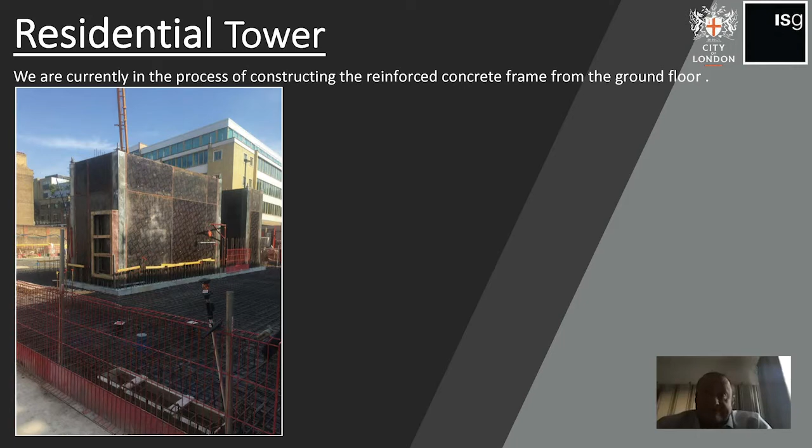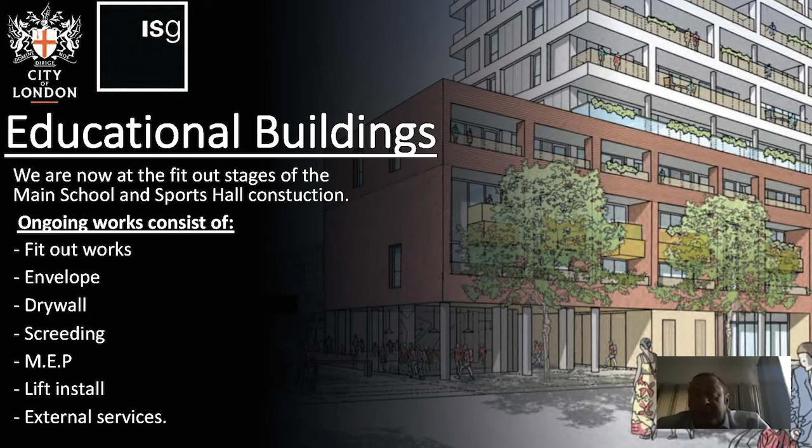If I could have my next slide, please. Right, I'm going to go on to the educational buildings now. Basically, most of the work we've done, and the most advanced section of our works, is the main school building and the school sports hall.

I've got two slides up on the screen now. The one on my left is of the corner of the sports hall, and the one on the right is from the entrance to the school on Baltic Street West, looking to one side, into the nursery area. What this slide shows is that we have started brickwork. The brickwork's quite advanced, and we're approaching the first floor sort of level with the brickwork.

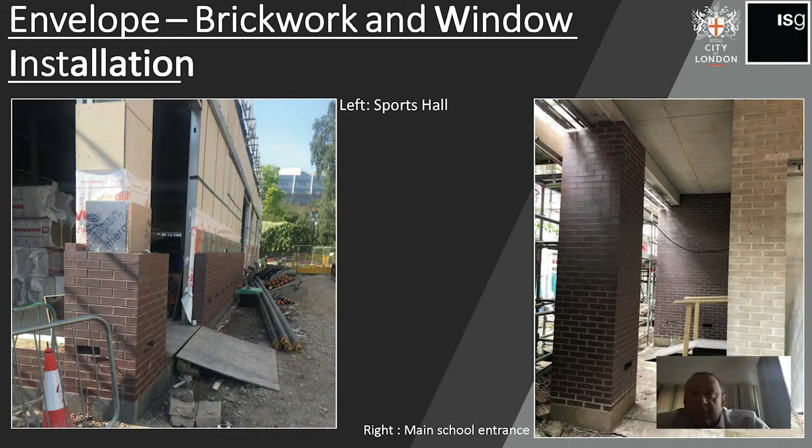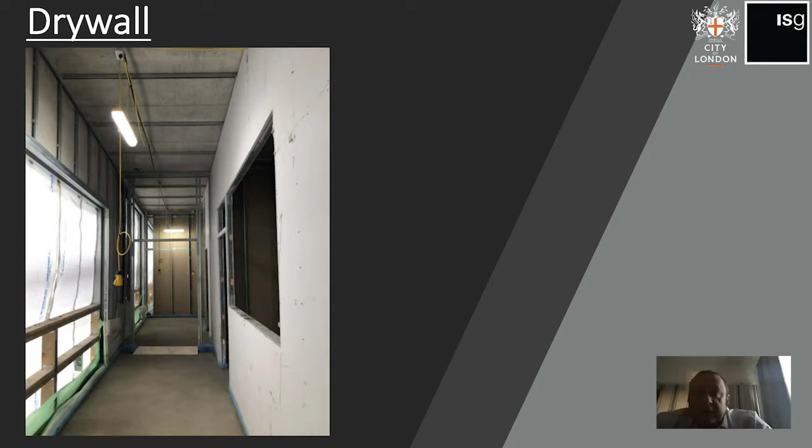If I could have my next slide, please. Again, inside, what we've been able to do, and which I think is common practice now, is waterproof the building using temporary measures, and we're advancing with the internal partitions and some of the services within the school building. I think I took this photo on the second floor, and it's looking down one of the corridors. If I could have my next slide.

Again, this is looking down the corridors. I took this slide to give an idea of the floor finishes. So again, we're quite advanced, and we've laid screed. You could probably see the screed is in the process of drying out, so it's only just been laid.

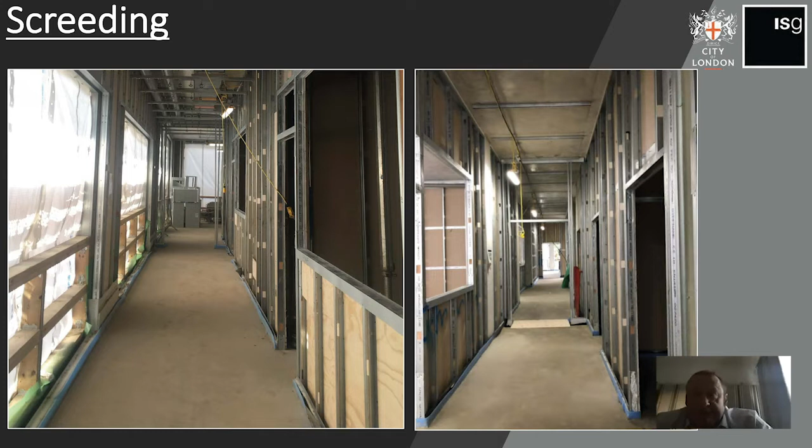Again, this is services. So again, we're quite well advanced, and you can see the services within the school building. I would say at this point, what I've shown you within the school building, really this is what we'll be doing for the next month, 2 months, 3 months. A lot of it will be building on the progress we've made, putting in more services, and starting the finishes, closing up partitions. Again, the 2 slides show our mechanical electrical installation.

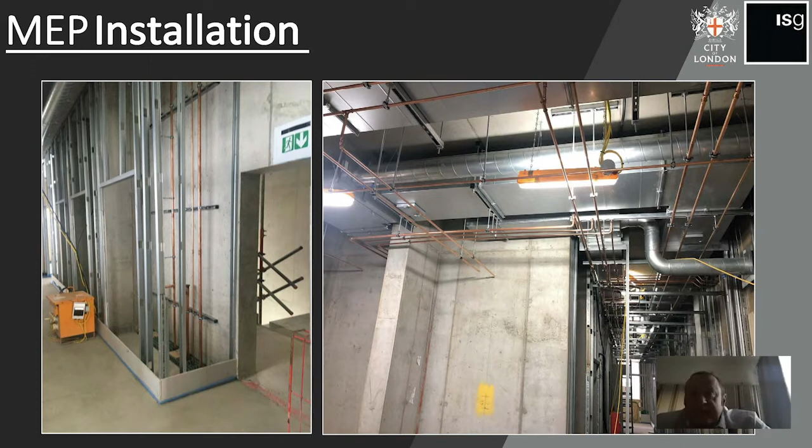For those of you who don't know, MEP means mechanical electrical plumbing installation. I put this next slide in - it's a bit of a boring slide, really, but the point I wanted to make is we've got the lift shaft formed in the school, and it's ready to accept the lift that's been supplied to us by KONE, a well-known manufacturer. I'm hoping to start the lifts around the end of October, and they'll take about 6 weeks, I'm hoping, to install.

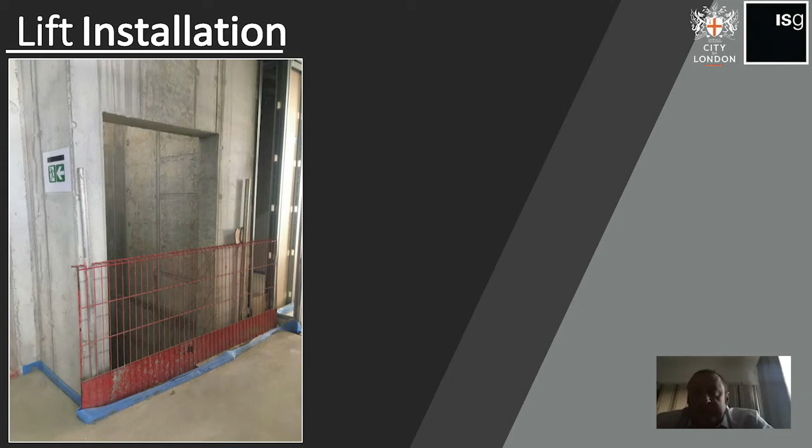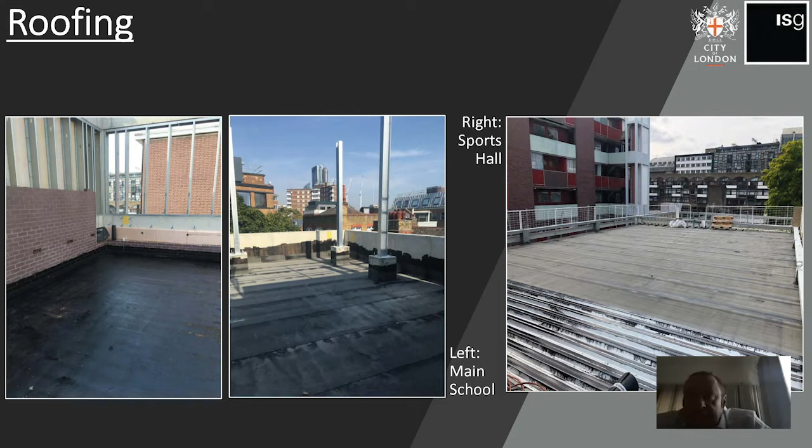My next slide. Have you got my next slide, Catherine? Yeah, I think there might just be a little bit of delay, Steve. Right, turn it to the next one. Can you see that now? Oh, right, okay. Yeah, that's fine.

What we're doing through the centre of the site is we're putting in all the external services. So for those of you who overlook us, you can probably see this trench, and basically that's for putting in gas main, comms, electrical services, district heating, water - generally all the services that you'd normally expect to have in the building. So they're the services that will be feeding the building, and they're picked up from Golden Lane.

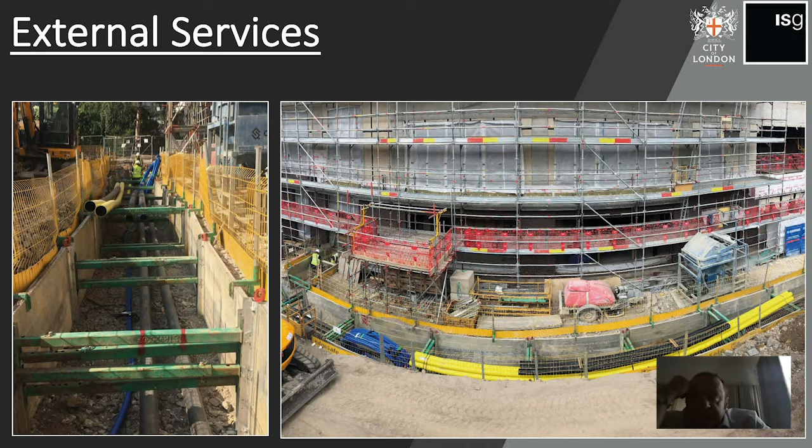So generally progress is going well. What you've seen really, and what I've spoken about this evening, is what we're going to be concentrating on over the next couple of months. I think this is my last slide, so if anybody's got any questions, I'll be pleased to answer them at the right time. Oh, I can't forget this one.

It's the monitoring results. We continue to monitor noise, vibration, and dust at 2 stations that we've got now - one behind our offices on Basterfield Service Road, and one at the back of the site by Hatfield House. This is a sample of one of the graphs that we sent over. Again, we continue to publish the results on a monthly basis that I believe is attached to one of the newsletters.

Yeah, that's right. I think that's it, isn't it, Catherine? Yeah, that's it. Just to note, the monitoring results go up on our website for the previous month, so you can view them all there if anybody's interested in taking a look.

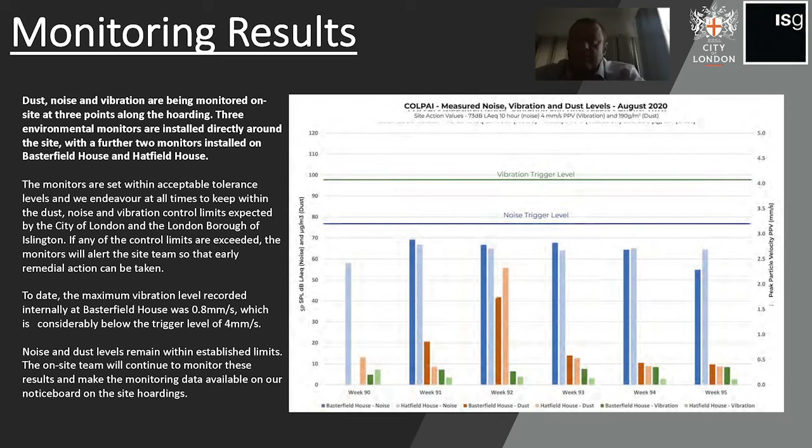I'll take them in turn. So the first one is: taking into account COVID spacing requirements, we do not know what will happen in the future. Are there any plans to increase spacing in the common areas of the new development, school corridors, etc.? Steve, would you be best to answer that one?

Sorry, are we talking about COVID? Yeah, so in regard to COVID and spacing requirements, are there any plans to increase spacing in the common areas of the new development, such as the school corridors?

Hi Steve, it's John here. Does the question relate to the permanent design of the building? Because if it relates to the permanent design, the design of the school isn't being altered to suit whatever social distancing might be in the future. The design is fixed. Yeah, I think it's in regard to the actual new development and school corridors.